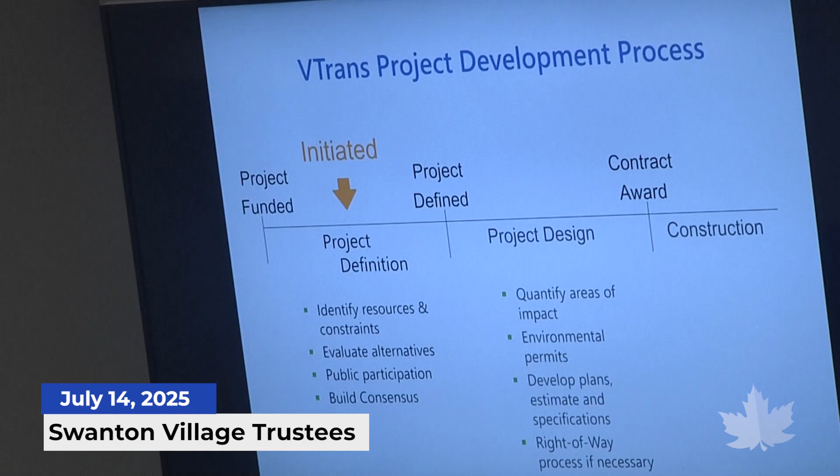This is a high level view of the V-Trans project development process. You can see that we're very early on, in what we call the project definition phase. What we've recently done is completed what we call a scoping report, which goes through and identifies the resources that are going to be impacted or potentially impacted by the project, and goes through the project constraints specific to the site.

We go through the different alternatives that are viable for the location, engage the public, and get feedback. We had a local concerns meeting earlier on, about a year ago now, where we started that process with the public, so we're following up again now. We're trying to build consensus with the Village of Swanton on the direction forward we want to take, to the next step, which is design, we're not at design yet, as you can see on the screen. So before we go to design, we want to take all of these steps and build consensus before we move forward.

Before we go through the alternatives, we'd like to do a quick overview of the terms we're going to use, since when we're talking about a bridge there are a bunch of different elements I might mention that could be unfamiliar. So we'll start at the top and work our way down.

Everyone's able to see the bridge railing, which is a safety mechanism to prevent vehicles from going over the sides. Then you have the deck surface treatment, which is most typically pavement, the most common type, but you can also have concrete type surfaces on top. The deck itself is usually a reinforced concrete element, and that's the riding surface the vehicles travel on.

That deck is supported by what we call the superstructure, most commonly comprised of beams—in this bridge's case, steel beams—which run parallel to the direction of traffic and are supported by bearing devices. Those bearings help accommodate movement, since bridges expand and contract due to weather and temperature changes. Together that makes up the superstructure.

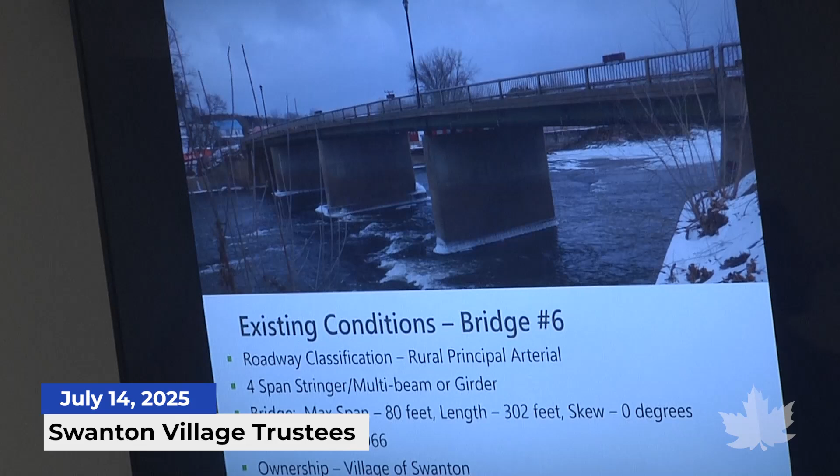It has a max span length of 80 feet, and the overall bridge is about 300 feet. We don't have a heavy skew relative to the waterway—it's pretty much perpendicular. It was built in 1966 and is owned by the Village of Swanton.

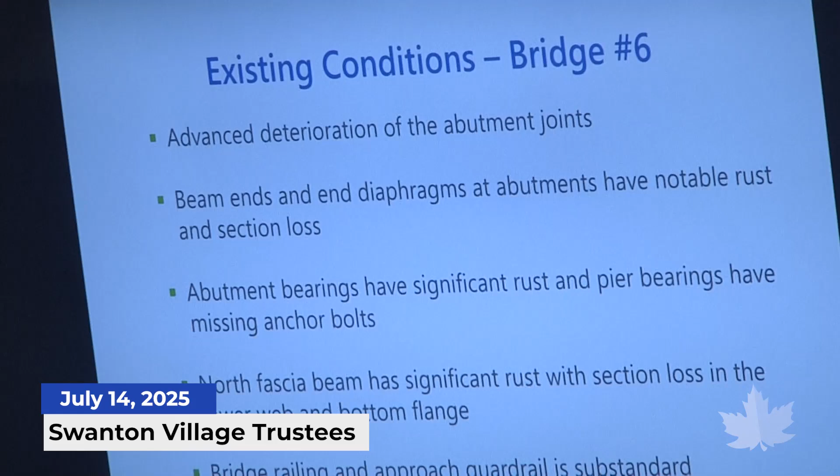As far as the condition of the structure, there's been advanced deterioration of the abutment joints. We know a joint rehab was most recently done, which was beneficial—I actually went out and took some pictures of it for the meeting, and it looks good.

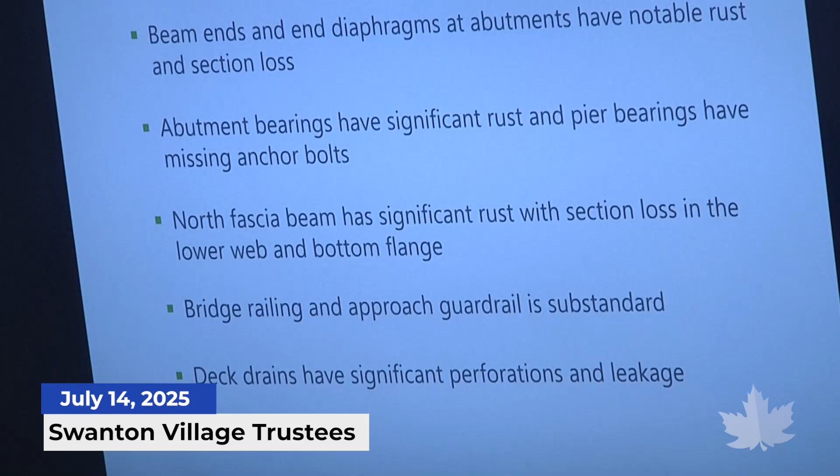But while the joint rehab is a good first step, the joints are still the most likely element to deteriorate. Below the joint, there's continued leaching of salts and water, and the structure supporting the joints will also need to be addressed due to deterioration from water and salts getting down through the joint—particularly at the beam ends and diaphragms.

Those locations, where salts and water come through, have rust and section loss. When we say section loss, that means actual loss of the steel material. The beam ends having that loss is significant since the beams support the deck and riding surface.

The abutment bearings, where the beams sit and handle movement, have rust and missing anchor bolts. As they rust, they can seize up, preventing them from moving the way we want them to with temperature changes.

The northern fascia beam has significant rust and section loss in the lower web and the bottom flange. That's the one that carries the utility. The bridge railing and approach rail is substandard per current safety guidelines in terms of the latest FHWA requirements, which is pretty common with bridges not built in the past 10 years. The deck drains themselves have perforations and leakage from water and salts going down through there.

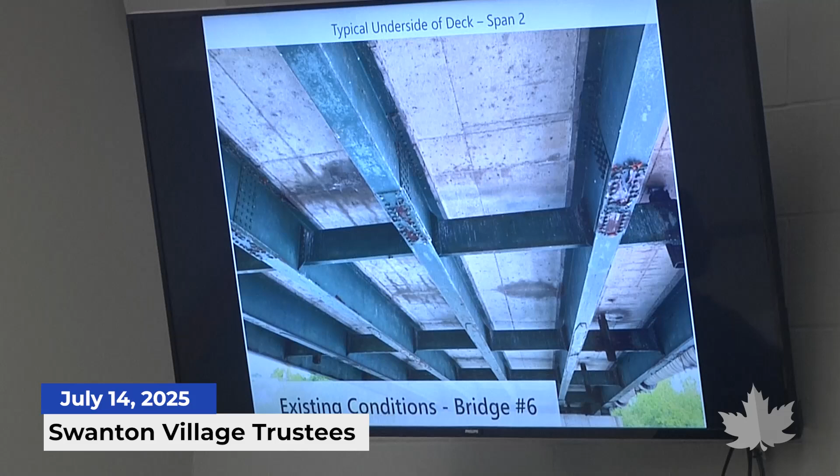Here we have a typical underside of the deck - you can see this is kind of in the middle of the span. We have some spot rusting and some evidence of water leakage and concrete deficiencies you can see on the underside of the deck, but it's minimal peeling paint and not a significant amount of rust in this photo.

Then as you go to where the beams sit at the abutment locations below the joints, directly below the joints they're getting more water, more salts, more debris. So you're seeing more rust, more deterioration, and some more section loss to the steel.

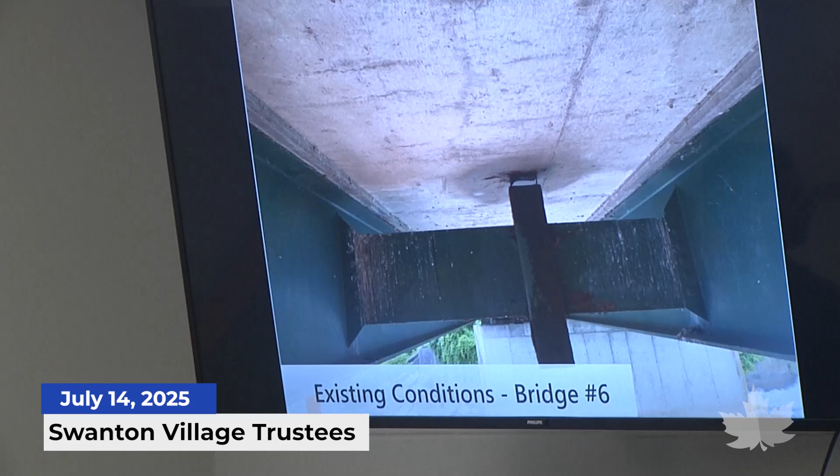This is just a picture of one of the deck drains. Obviously this sees a lot of water and salts, so we're seeing some perforations in the actual drains that carry the water down from the deck level.

Moving past the structural elements, looking at the historic impacts - the bridge itself isn't historic, but there are resources in the project area considered historic or eligible for historic listing, which we noted in our scoping study. This includes the Swanton Village Historic District, the Swanton Dam, and the mill adjacent to the northwest corner of the bridge, as well as the town-owned Marble Mill Park and the Goose Point Park. These are all important assets and entities immediately adjacent to the bridge itself, to be considered when we're going through the alternatives and their impacts.

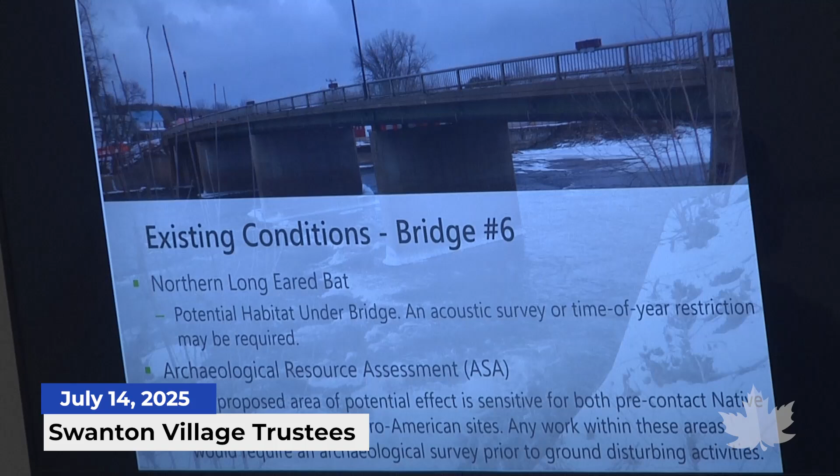From a resource wildlife perspective, there's potential northern long-eared bat habitat under the bridge. Based on the acoustic survey V-Trans will do, there could be time of year restrictions if they find it is a habitat - we'll have to be sensitive to that if evidence of a long-eared bat habitat is found. We also have a proposed area of potential sensitivity to both pre-contact Native American and historic Euro-American sites.

These sites are immediately adjacent in the approaches, so depending on the alternative selected, the impacts to those areas would be dependent upon the recommended alternative and what the scope of the project actually is - how much it affects the approach areas.

For utilities, we have municipal utilities directly mounted to the bridge - a gas line and a water line. We know these utilities are important, and we need to coordinate with the town about maintaining service and what the options are for those utilities in the event they are impacted by the selected alternative.

There are telephone manholes and sewer manholes in both approaches. We have public aerial lines running parallel to the structure on the north side, a decent distance from the bridge - these were noted for some of the more impactful options of bridge replacement, and came into play when we considered them. But as you'll see, we're not recommending replacing the bridge, so that impact doesn't really come into play too much.

Again with public utilities, we also know there is a 60-inch diameter pipe in the west approach running perpendicular to the bridge, and there have been some notes of settlement in that area immediately adjacent to the pipe.

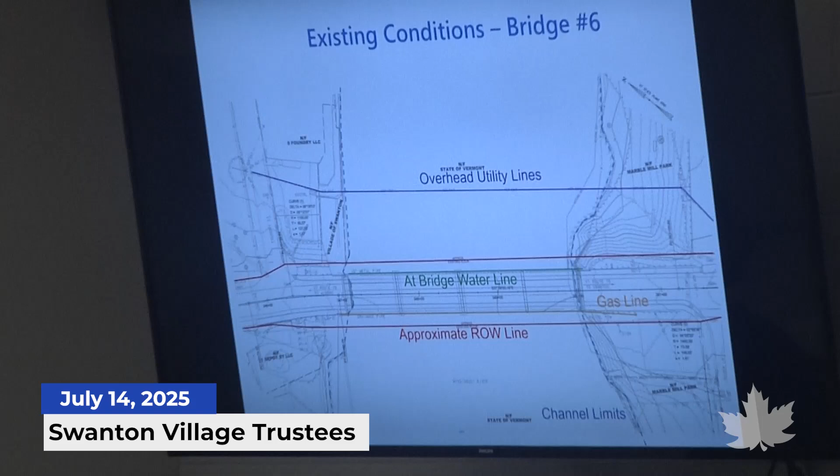Next slide is a quick highlight of those utilities I just mentioned, as well as the right-of-way line. There's also a conduit on the bridge for the lighting, since the bridge currently has lighting, which is just running along the bridge railing right now.

So, going into the design considerations and the criteria, we're always following Vermont state standards and the V-Trans Structures Design Manual, which are publications put out by V-Trans available on the website.

Following the requirements for a two-lane rural principal arterial, considering the substandard criteria for that roadway classification, which is the approach and bridge shoulder widths, the bridge railing and approach guardrail per the latest FHWA requirements, making sure that we're meeting the structural capacity requirements for FHWA.

And the past criteria, this is the stuff that's already meeting horizontal geometry, vertical geometry, so that's how the road is laid out, both in plan view and then vertically. So profile would be like if you are coming up a steep hill and have bad sight lines, this is acceptable for that criteria for the roadway classification and the design speed.

Similar with super elevation, that's more about if you have a roadway with a normal 2% crown versus something that maybe has something more extreme, it's meeting those requirements for the roadway, as well as the clear zone, which is the offset relative to the travelway, as well as the guardrail and everything protecting the approaches as you lead up to the structure.

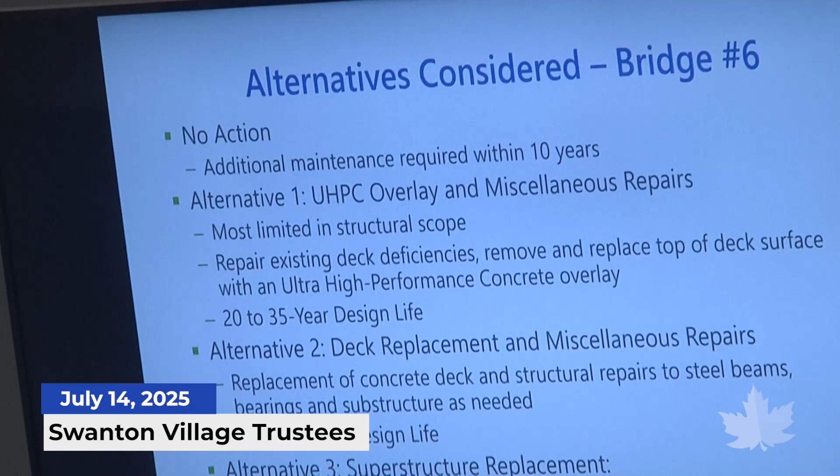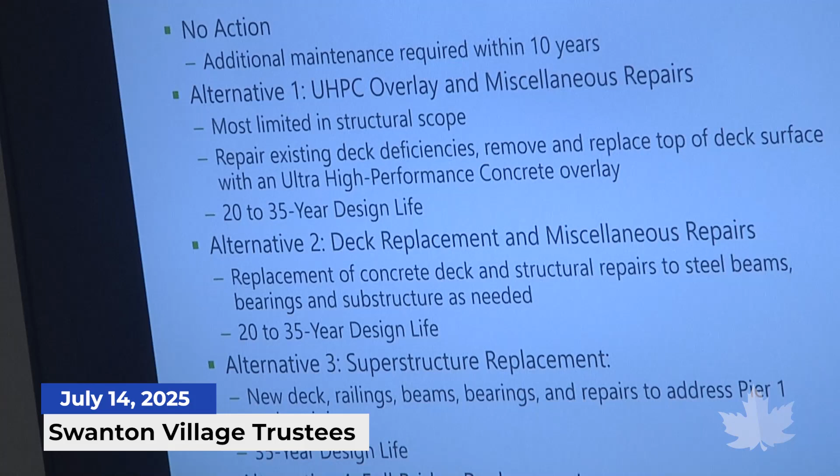The first alternative that we went through was UHPC overlay, which stands for ultra high performance concrete. It's a type of concrete that is both stronger and denser than a regular concrete mix that you would see. The idea is to use that as your deck surface treatment, and to remove about a half inch of your existing deck.

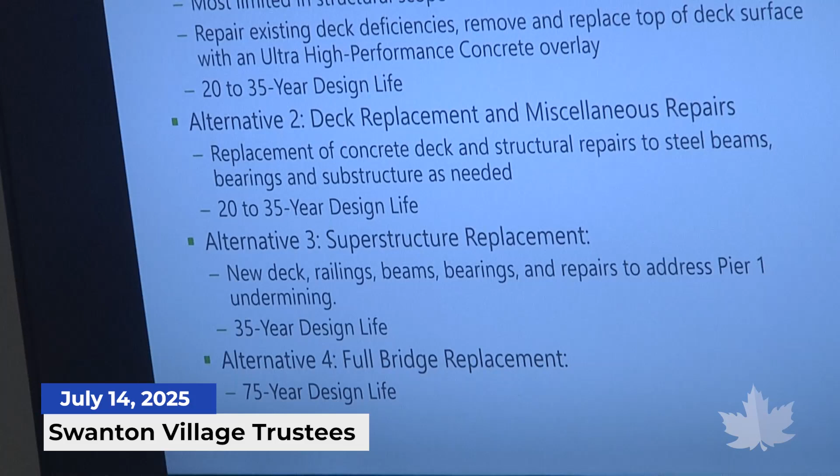And to come back with that more dense, higher quality, stronger material to protect your existing deck and beams below for a longer period of time. We would also be doing miscellaneous repairs of areas that had the highest need in addition to that UHPC deck overlay. It's the most limited structural scope that we have, but it hones in on the areas that we think need the most attention.

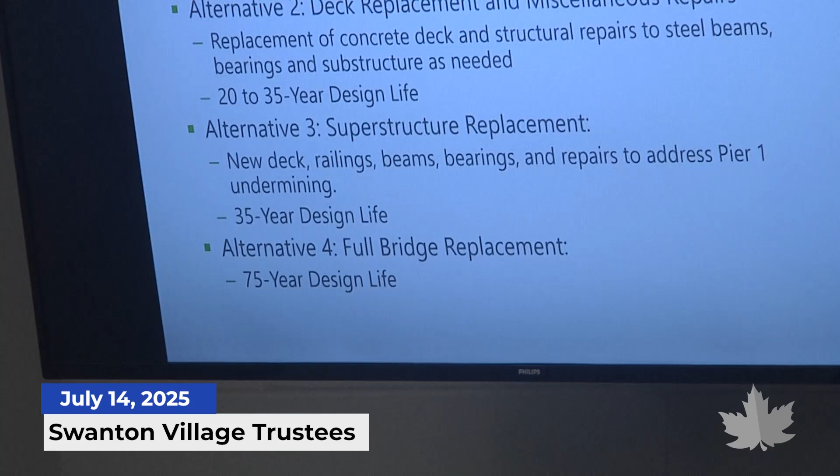So taking a step further, instead of doing an overlay of the deck, we're going to replace the deck in its entirety. The concrete deck slab that's currently on the bridge, we would keep the beams, but pour an entirely new deck, which would then also come with new sidewalks and new railing. But we'd be keeping the footprint of the bridge the same as it is; we wouldn't be widening or anything.

And then we would be doing targeted repairs, as I mentioned, to areas of most need, including the steel beams, looking at the bearings, and some patching as needed on the substructure, the concrete piers in the water, any type of spalls, which are loss of concrete material, taking care of those as part of the scope.

And that would give you the same 20 to 35 year design life, mostly because the concrete you're using for the deck is the more conventional concrete. We don't take UHPC and apply it in that same 8-inch slab over an entire bridge; that's not necessarily how it's used now and the best use of it. So you'd be using conventional concrete to replace your deck if you did a full deck replacement.

Superstructure replacement is alternative 3. So that would be replacing the beams, the deck, and everything above that, including the bearings. You'd basically be leaving and repairing the concrete elements that are in the water and at the ends of the bridge, and then putting new steel beams, new deck, new railing, and new sidewalk on top. It would be a similar footprint. We're not looking to drastically widen or change the footprint of the bridge, as it ties into the approaches right now, and there's no need to make the approaches significantly wider. It makes sense to match and tie into the corridor on either side as it is. That's proposed to be a 35-year design life with new steel members, based on the coatings available and the anticipated maintenance and service life.

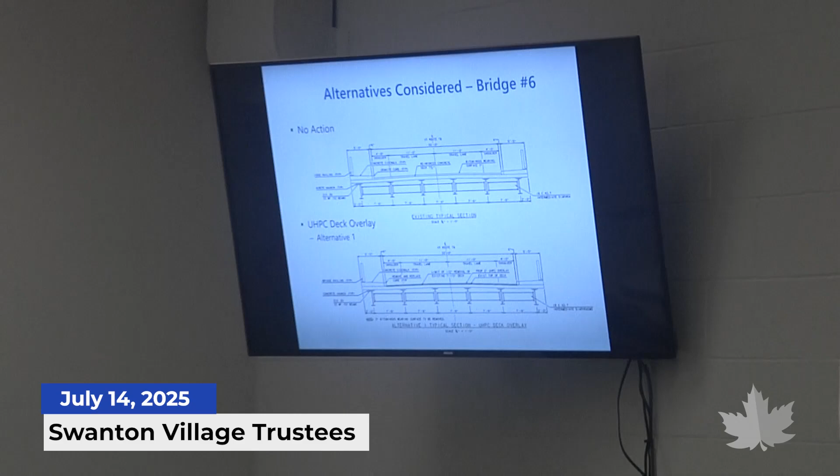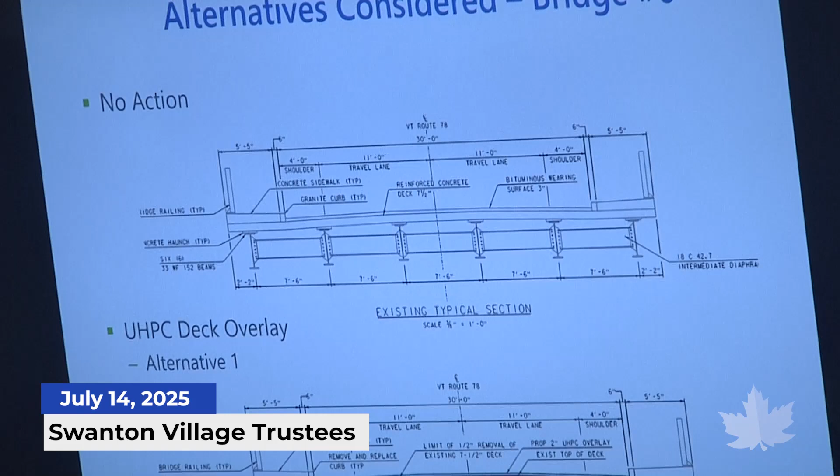So to help visualize that, we have some typical sections. I'm sure it's a little hard to read. They have similar dimensions though, because as I said, we're not changing the footprint overly based on these different options. We'd be maintaining a curb to curb width of 30 feet—we're not proposing to change that. We're also proposing to provide similar sidewalk widths as we do now.

So the two options shown here are no action, which is the existing structure—that's what the bridge is right now—and then the one below it is just the UHPC overlay. You can see it's maintaining the beams; nothing's changed in terms of the superstructure. We're just going to be taking off that top layer of the existing concrete deck and coming back with higher quality material on top for the overlay. We'd be keeping the sidewalks and the railings as is. So it's the least impactful scope of work.

So... you went the wrong way. Oh, we went too far. There should be one more slide, the second slide, of that one.

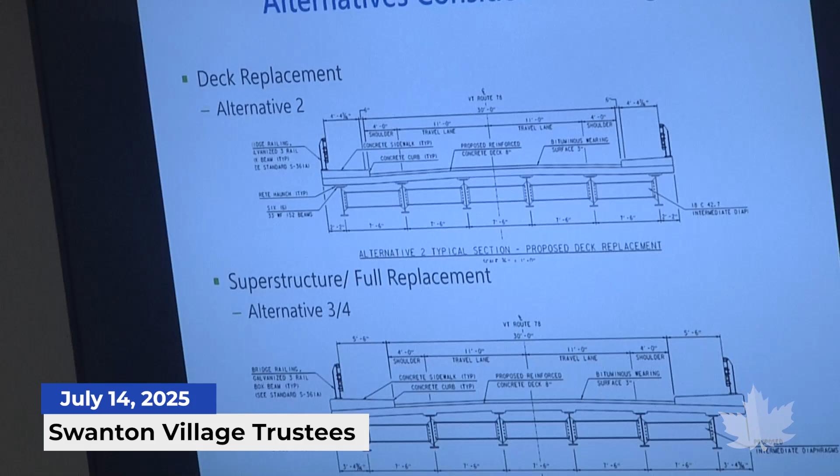So then the other options we talked about were the deck replacement and then a superstructure or full replacement. Since we're not showing the substructure, they'd have the same typical section, but it would just be for the deck replacement, keeping the beams and putting a new deck on top. We'd be providing the same 30-foot curb to curb, but we'd slightly change what's shown for the sidewalk, just because we'd be using a new rail system, and that new rail system is a different width than the current one. We would still have the 5-foot minimum sidewalk necessary for ADA compliance, along with a current standard FHWA crash test railing.

For the superstructure and the full replacement, we would just be replacing all the elements shown here: new beams, new deck, new sidewalk, new railing, with very slight widening but still pretty much matching the footprint of the existing bridge.

So when we completed the scoping study, we came to the conclusion that there are really two viable alternatives for consideration, not necessarily just one. That's one of the main reasons we're hoping to get feedback from this presentation. We think the two most viable alternatives we would recommend are alternative 1 and 3. Alternative 1 is your UHPC overlay with miscellaneous repairs.

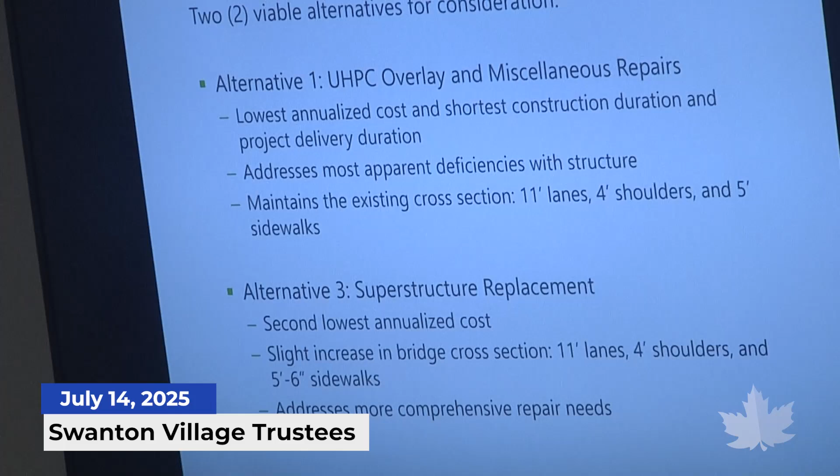So what we do is come up with the conceptual high-level cost, and then divide that by the anticipated service life to get an annualized cost—the cost per year. So when we say lowest annualized cost, that's what we mean: the cost per year of expected life versus the total cost. It has the lowest annualized cost, as well as the shortest project delivery duration—how long it takes VTrans, in conjunction with stakeholders, to get it from advertisement to construction. It addresses the most apparent deficiencies with the structure, the ones we're most concerned about right now, and it maintains the existing cross-section, which ties into the approaches and makes sense for this stretch of 78.

For your alternative 3, the superstructure replacement, this had the second lowest annualized cost. It has just a slight increase to the bridge cross-section—we're able to get 5.5-foot sidewalks as opposed to the current, which is about 5 foot 2 inches. It also provides a more comprehensive scope of repairs for all the elements we talked about before.

So if we go to the next slide. With those two recommended options, keep those in mind. We'll go back to them when we summarize. We also have to think about how we're going to maintain traffic for those recommended scopes from a structural perspective.

Our options are always going to be to look at maintaining traffic on the existing bridge, or an off-site detour with a bridge closure and a temporary bridge for traffic during construction, or to try to phase the construction, like a one-lane alternating condition while we do half at a time.

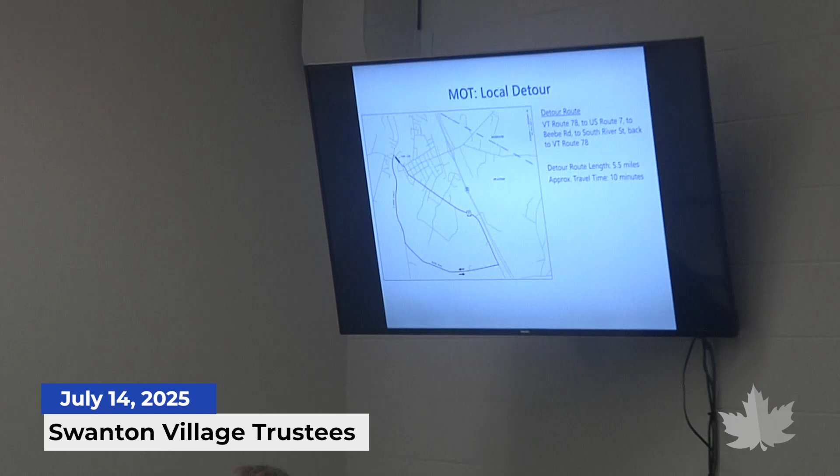For the local detour, it's a little zoomed out but I can describe it. With the bridge carrying 78, it's immediately adjacent to the intersection with Route 7. So the detour would use 78 to go to Route 7, to Beebe Road, to South River St., and then back to Vermont Route 78. This is not the recommended truck detour, but the expected detour for people in the area bypassing the site, kind of what we'd expect where they'd go to get around the work. Detour length is 5.5 miles, about a 10 minute drive time.

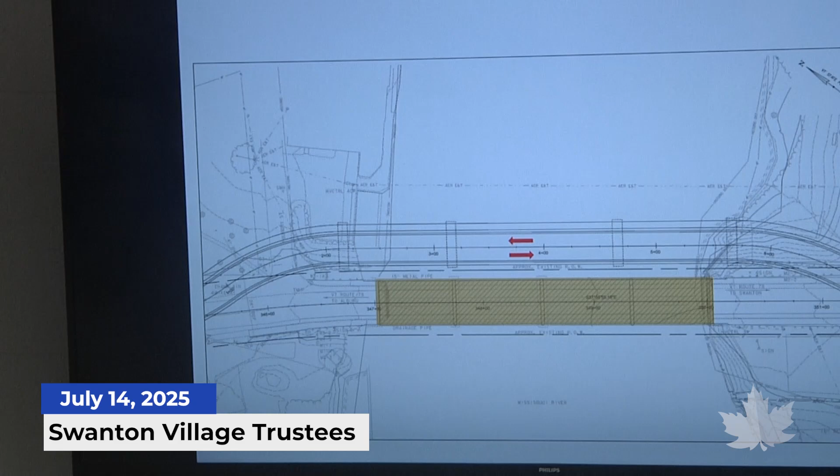For the alternatives, we also looked at a temp bridge and the potential of where that would be and what it would look like. As we ran through this option, it didn't seem like it was necessarily the best approach, but with the location of the dam, we were restricted to one side where we could place a temporary bridge. So that was the location we looked at, and there were noticeable impacts based on that location and the need to fit two lanes of a temporary bridge for such a significant crossing.

We also looked at phase construction, which is one lane at a time basically being taken for the construction zone, while one lane alternating is maintained. This creates very tight work zones and also extends the construction duration. Since you have to do half at a time, you lose a bit of efficiency in terms of having a little area of rework, and the contractor isn't able to fully mobilize within the limits they might like.

So, recommended scope. These were the two alternatives we flagged before as our recommendations from a structural perspective, and we're recommending both of those alternatives be looked at with a closure. So what we have here is a snapshot of the recommended scope and associated schedule and timeline items.

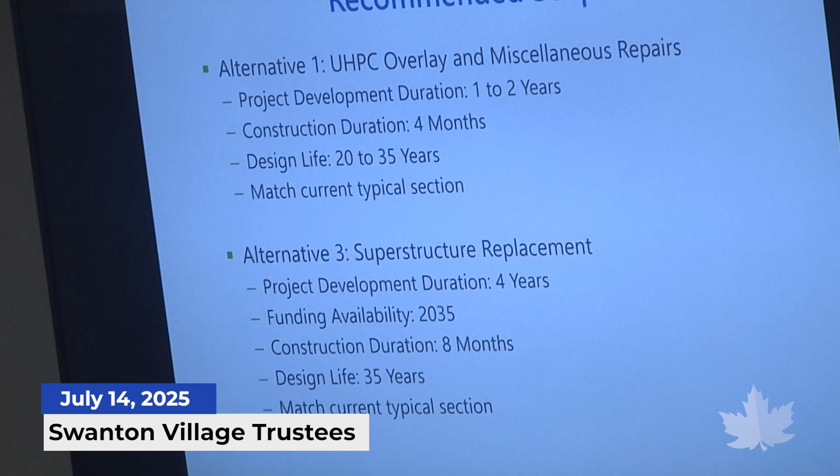For alternative 1, UHPC overlay with miscellaneous repairs, we're looking at a project development duration of 1 to 2 years - that's the time it takes us with VTrans stakeholders to get it out to advertisement. For construction duration, we're trying to accelerate that as much as possible since we're talking about a closure, so 4 months is what we're looking at, with the design life of that overlay being 20 to 35 years, matching the current typical section.

For alternative 3, the superstructure replacement, since it's a more significant scope in general, we'd be looking at a 4-year project development process, with funding availability estimated at 2035. So the difference we're highlighting is that the funding availability for alternative 1 would be more immediate than for alternative 3, which has more costs associated with it, more scope, more impacts, and a longer anticipated project development process.

We'll talk more about that, but that's the reason we're presenting two viable alternatives - besides having different approaches, costs, and scopes, they also have two different opportunities associated with the timeline and the funding. With alternative 3, it would be an anticipated construction duration of 8 months with the closure using accelerated techniques, with a design life of 35 years, and keeping to a very similar footprint as the existing bridge.

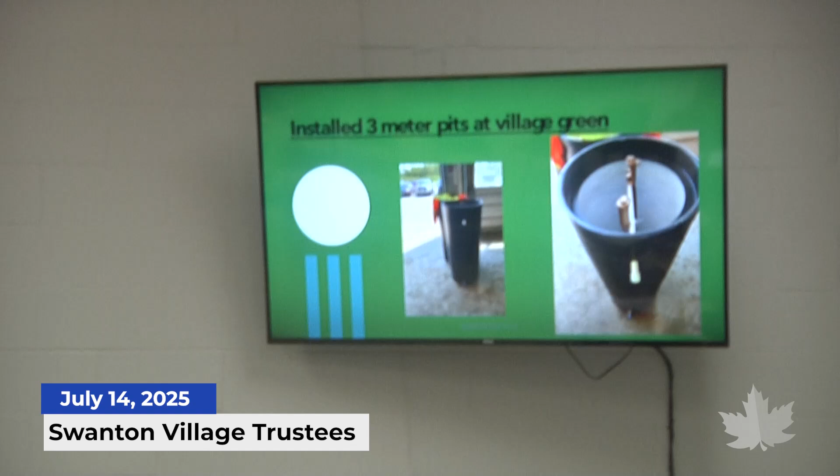In Village Green, we put in 3 new meter pits. We tried these meter pits because the Village is switching over, and there's a lot of camps down in the Quam and some others that have meter pits in them, and a lot of them are really old or homemade. These meter pits were put in and did not freeze, the meters are still in them. So these are going to be the meter pits that we're going to be installing throughout the village within the next year or two to switch over.

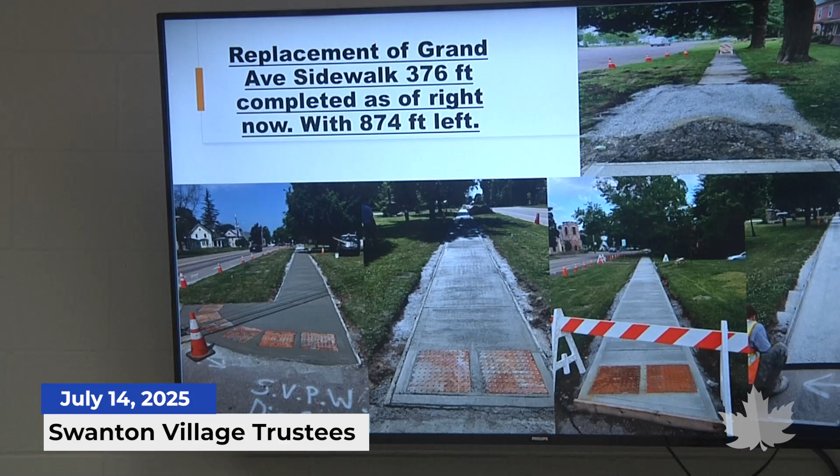Sidewalks, oh boy, that's a big issue. Every place has sidewalks, and every place needs to have sidewalks fixed. $15,000 for sidewalks is what the village has, and it hasn't been changed in over 35 years. It's been the same amount. We always think about taxes and what it costs people, and there is no place that has perfect sidewalks.

$15,000 will get you roughly about 320 to maybe 350 feet. That's not even a block of sidewalks. This all takes into consideration curbing. Curbing is a different animal, takes a lot more material. Driveways, you got to put more concrete in for the driveways.

Heidi got a grant for Grand Avenue, and we're looking to put in 1,250 feet of sidewalk this year with Public Works. That's a lot for us, we usually do about 320, 350. We'll be working on this till snow flies.

We got 376 feet done right now. We're gonna stop at St. Marie's, then we'll turn around and start on York Street, and hopefully we'll make it to Furman this year. That'll be 1,250 feet of 5-foot sidewalk down through there.

Working on another grant to go further. I do know that there are other sidewalks out there, but this sidewalk, what we're doing now, would take us a little over 3 years to do, to go that far.